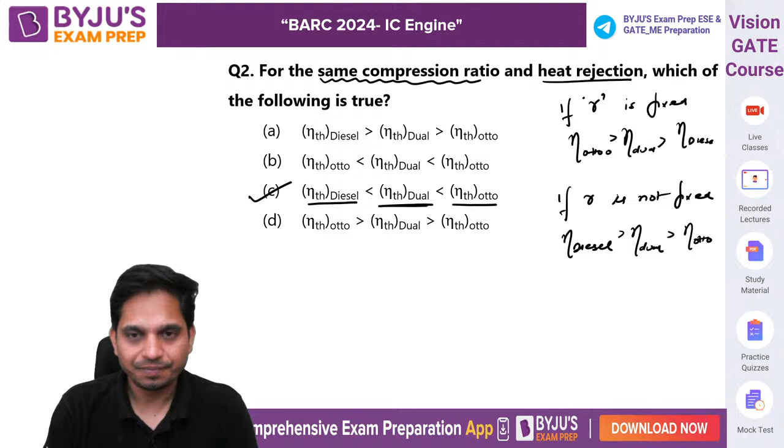So what is the right answer? A, B, C, D. Option C. Diesel is the lowest one, Otto is the highest one, in between you have dual cycle. Yes? Correct? Chalo, question number 3.

Supercharging in diesel engine is done primarily to... So what is supercharging basically? Supercharging is increasing the pressure and temperature of the intake air, मतलब intake charge, not just air, whatever charge is coming. So why do you do supercharging in diesel engine?

Supercharging is not done for thermal efficiency. It is done for mechanical efficiency. We are not doing anything with the heat transfer. Thermal efficiency is the work output that you are getting out of the heat supply. So we are not improving anything here.

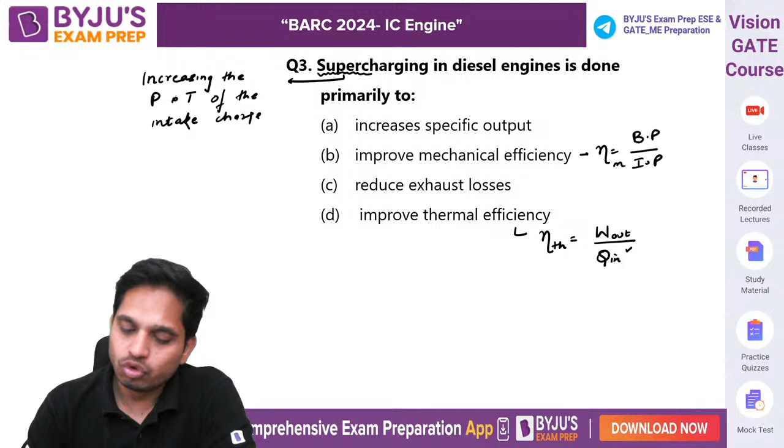What we do is we deal with indicated power and brake power. Brake power by indicated power. So it is done to improve the mechanical efficiency, not the thermal efficiency. Okay, chalo. Very simple question.

A diesel engine has a cut-off ratio of 2 and compression ratio of 20. Gamma is 1.4. Calculate air standard efficiency. Now this formula you need to remember: 1 minus 1 upon R to the power gamma minus 1. This is the efficiency of Otto cycle. You can multiply by RC minus 1, divide by RC minus 1. In the numerator, put a gamma here. In the denominator, put a gamma here. That's all. This is the efficiency.

1 minus 1 upon 20 to the power 1.4 minus 1, and this is 2 to the power 1.4 minus 1 upon 1.4 into 2 minus 1. So you can solve it. This is 2, so it is 1.639 upon 1.4. How much do you get? कितना आ रहा है ये?

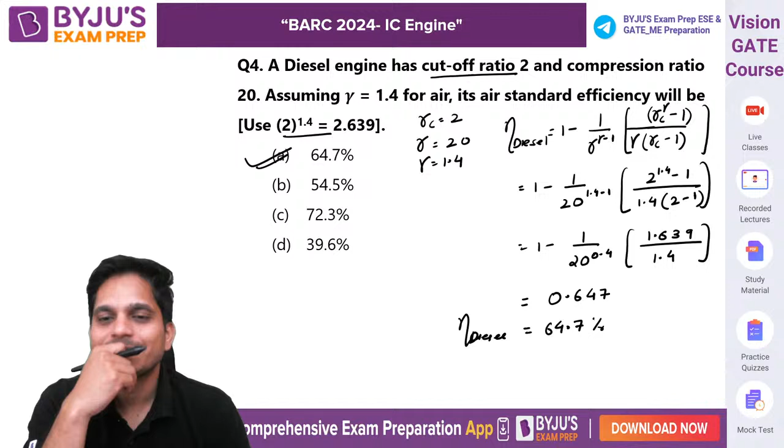I think you are going to get 0.647, something like this. And the answer is 64.7%. Are you getting the same? I hope that you are getting same. Yes? चलें आगे. Question number 5.

A car has a 4-stroke inline diesel engine whose compression ratio is this, expansion ratio is this. Find out cutoff ratio. You have to always remember the relationship, otherwise it will take some time, and you do not have that time. Compression ratio is equals to expansion ratio into cutoff ratio. With this expression, you can find out anything that you want.

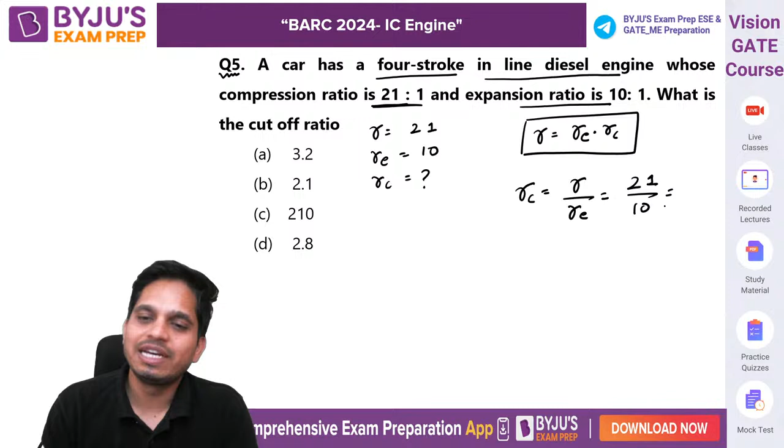In this question, you want to find out cutoff ratio. That means compression by expansion ratio. This is 21. This is 10. What is the answer? 2.1. You need to remember these equations, okay? Otherwise, if you start solving it, it will be an issue. Correct? ठीक है.

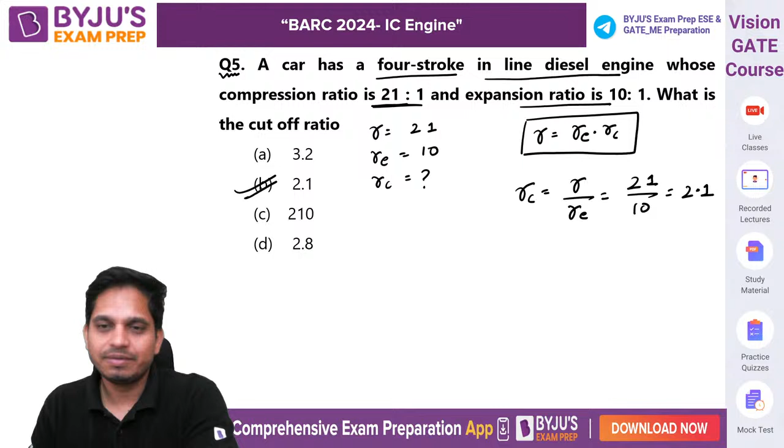At what cut-off does the efficiency of the diesel cycle approach that of the Otto cycle? So we all know Otto cycle efficiency is 1 minus 1 upon R^(gamma minus 1). Diesel cycle is 1 minus 1 upon R^(gamma minus 1), into, as I just now told you, (RC^gamma minus 1) upon gamma (RC minus 1). In the numerator put a gamma here, denominator put a gamma here, and this is your diesel.

Now you see, the best option here is not given, because the best option is when the cutoff ratio is equal to 1. So you will get diesel cycle efficiency as 1 minus 0 by 0. So you will apply L'Hospital's rule here, and you will get 1 minus 1 upon R^(gamma minus 1), which is the efficiency of the Otto cycle. But this is not given. This is not given because RC cannot be 1, okay?

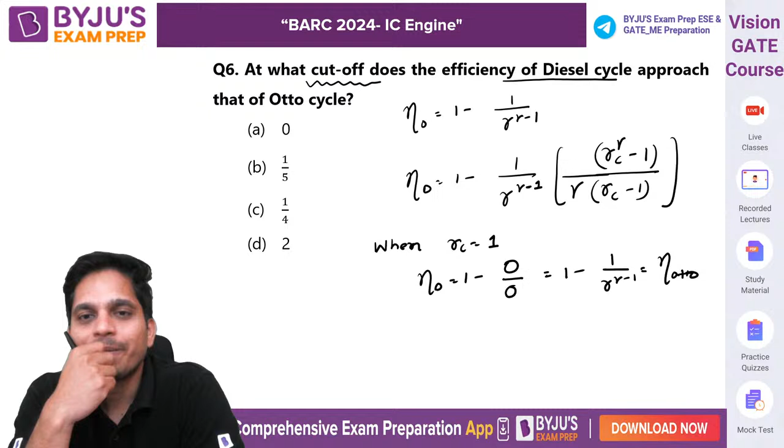So now the best option, we have to choose out of what is given to me. The best option here is when you put RC equal to 0. When you put RC equal to 0, you are going to get 1 upon gamma R^(gamma minus 1). So it is basically gamma times more, simply. It is almost the same as the Otto cycle. The only difference is gamma between them.

Okay, here we have a gamma factor. So this will be less and this efficiency will be more. It is gamma times more, but gamma is about 1.4, so almost 50% more basically. So it is slowly approaching the Otto cycle. If 1 is not given, then 0 is the best answer for you. If 1 is given, then you have to mark 1, because basically they are going to expect that from you. Okay. I hope it is clear.

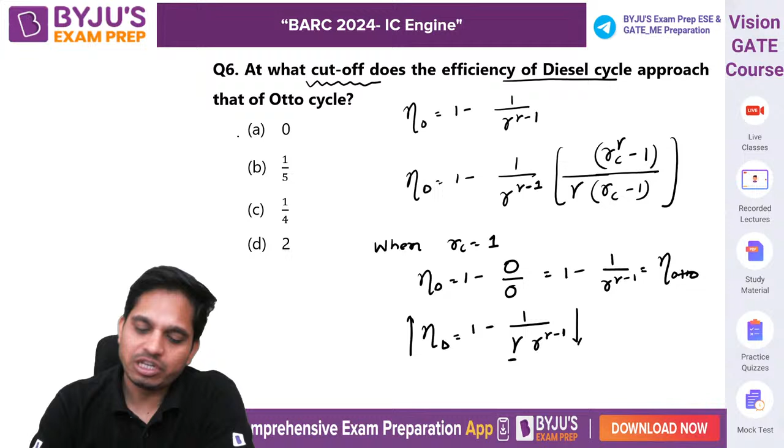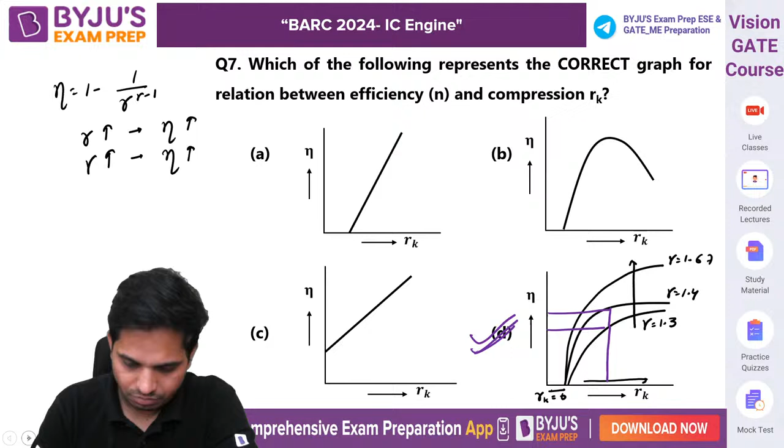Guys, I hope that you are doing it with me. Yes? Can you give me a yes if you are doing it?

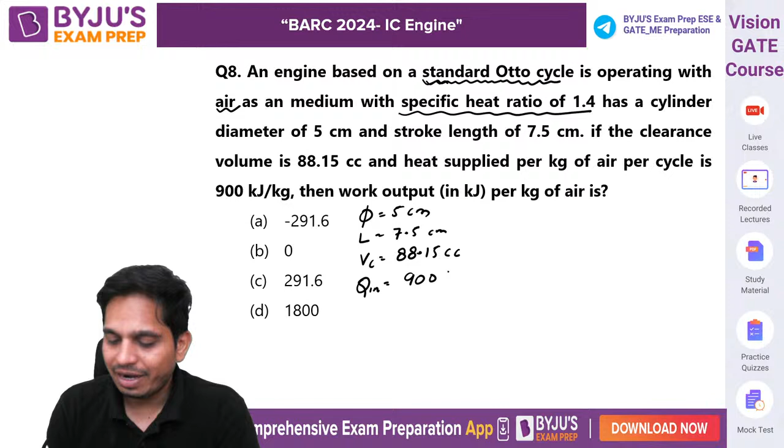An engine based on a standard Otto cycle is operating with air as a medium, with specific heat ratio 1.4, has a cylinder diameter of 5 centimeter, stroke length of 7.5 centimeter. Clearance volume is given as 88.15 centimeter cube, and heat supplied is 900 kilojoule per kg. Calculate net work output. What do you think we should do here?

So it's very simple. We have the efficiency formula for Otto: 1 minus 1 upon R^(gamma minus 1) is equal to net work by Q in. If somehow I am able to find R, I can find net work, because net work will be Q in times (1 minus 1 upon R^(gamma minus 1)). Gamma I know. Only R is required. How do we find R? We know R is equal to 1 plus swept volume by clearance volume. Clearance is already given to me. I need to find out swept volume.

So 1 plus pi by 4 D square into L upon clearance volume. So 1 plus pi by 4 into 5 square. Sir, why are you not changing centimeters into meters? Because in the numerator also you will get cubic centimeter, and this is already given in cubic centimeter, so it does not matter. How much R are you getting? So this is 0.785 into 25 into 7.5 upon 88.15, plus 1. You will get R. Whatever R you are getting, you can put it here, with Q in as 900.

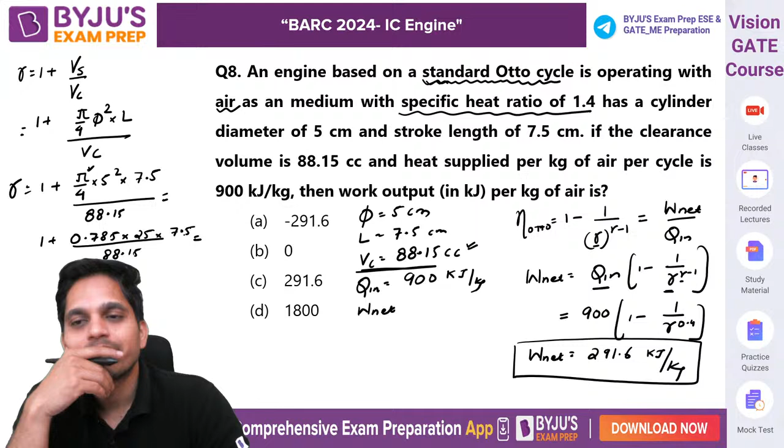2.66. Very good. 2.67. Okay. That you can put here. And I think you will get the same efficiency, if I remember correctly.

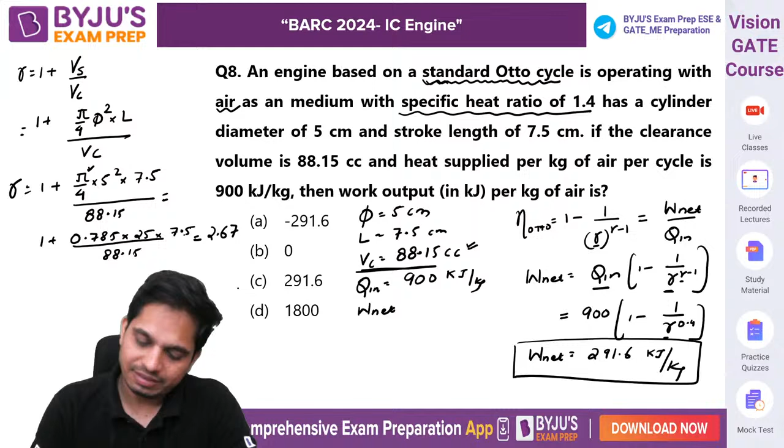Question number 9. In an Otto cycle, air is compressed from this volume to this volume. Okay, from the starting pressure of this, net output per cycle is given.

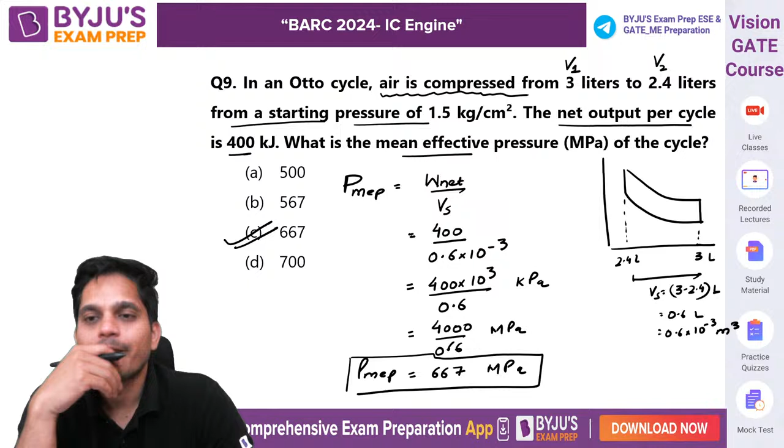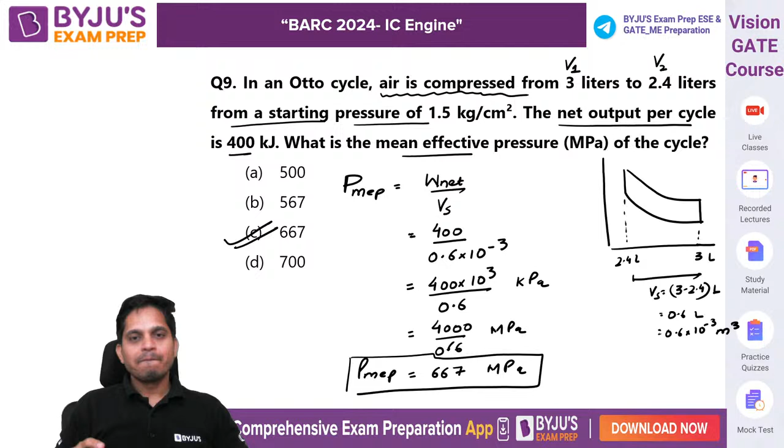Question number 10. Number of working strokes per minute for a 2-stroke engine cycle as compared to speed of the engine in RPM. So it's very simple. The language looks very tricky, but the question is very simple.

Look, whenever there is one revolution of your crankshaft, then it is one working stroke. One working stroke. Right? In one revolution, we have total 2 strokes, but only one working stroke. Yes or no? One revolution of the crank is equal to, whenever we have one revolution here,

so from here to here, 2 processes, then from here to here, 2 processes. So in the entire revolution, we have total 4 processes, but 1 working stroke. So in total 1 revolution, we have 1 working stroke.

Now it is asking how many working strokes in 1 minute. So working strokes per minute you need to find out in 1 revolution, in 1 RPM, 1 revolution per minute. So basically we have divided both. If 1 revolution has 1 working stroke, then 1 RPM, 1 revolution per minute, is equal to 1 working stroke per minute.

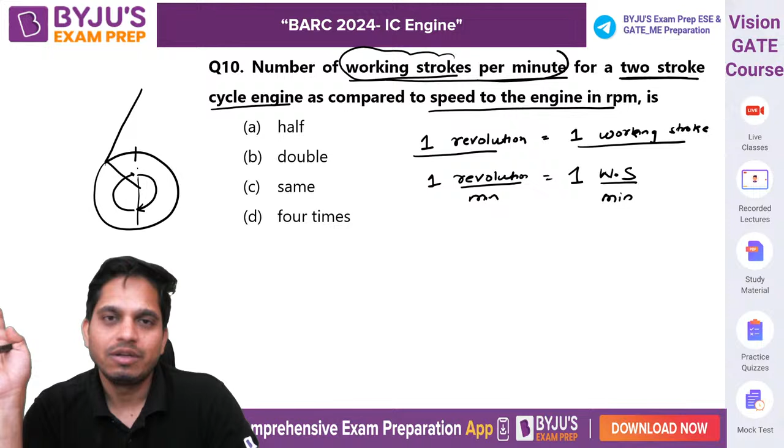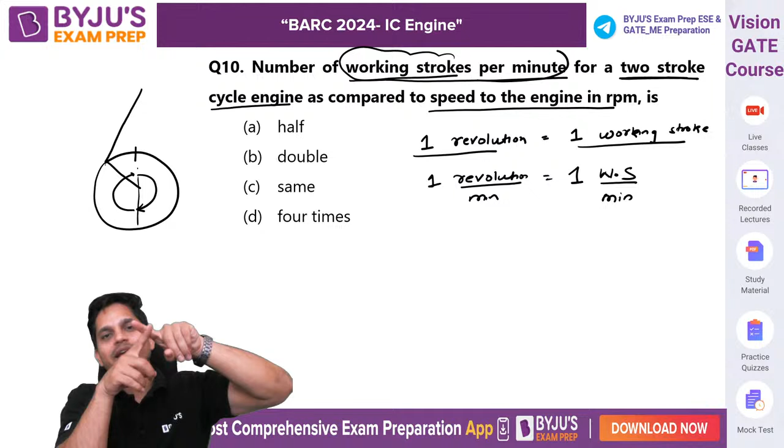Okay. So basically it is trying to say, if you are making 1 revolution in 1 minute, then you have 1 working stroke in 1 minute. If you are making 10 revolutions in 1 minute, then you have 10 working strokes in 1 minute. Simply. Okay, got it? So it is basically the same for 2 stroke. For 4 stroke it is half.

Right? Because for 4 stroke, in 2 revolutions you have 1 working stroke. So 2 revolutions per minute is equal to 1 working stroke per minute. So 1 RPM is equal to 0.5 working stroke per minute. I hope you get this, okay? It is very important. A lot of students remain confused with this for 2 stroke. Got it?

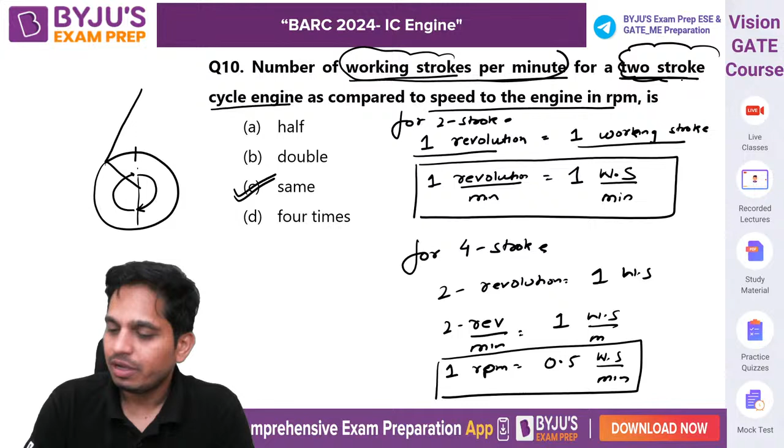Yes. Chalo, same. Because it is asking for 2 stroke, so it is same. If it is 4 stroke, it is half.

Which of the following statement is more relevant in the context of IC engine? Basically, it is asking which one is correct. Compression ratio of the fuel air mixture is in the range of 6 to 10 in spark ignition engine. Is it correct? Let's read other statements as well. Compression ratio for air is in the range of 16 to 20 for SI engine. No, 16 to 20 is for CI engine.

Walls of the engine cylinder of SI engine need to be thinner because the operating pressure or mean effective pressure is lower in SI engine compared to CI engine. Diesel engines, when we use them in cars or whatever, are much bigger, much thicker, much bulkier, much heavier. Compression ignition engines have less weight? No, CI engines have higher weight. So the only option that is correct is A. Yes.

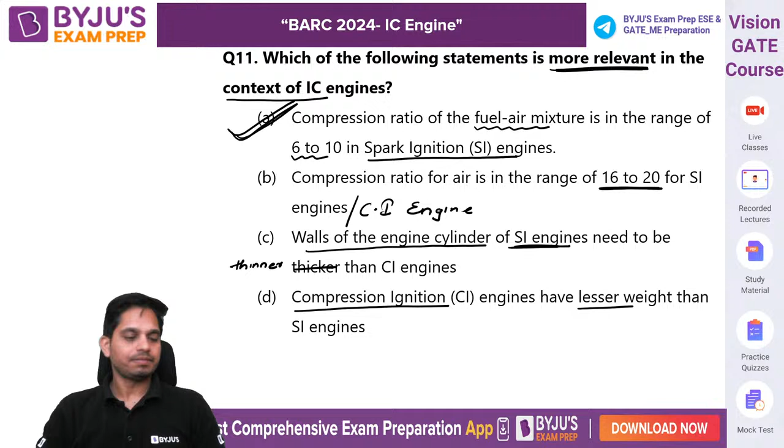Chalo, next dekhte hain. The function of piston rings in internal combustion engine is also to. Also means what is the other function? But what is the first function? First function is to provide sealing action so that the lubricating oil or your fuel air mixture will not be able to go down the crankcase. That is the first main function of piston rings, to provide a sealing effect.

Then what else? Increase the speed? No. Actually, it will have more friction because the piston ring is in contact with the cylinder. Prevent piston from corrosion? No, it is not. Cool the cylinder? For cooling the cylinder, we use lubricating oil. Dissipate heat to cylinder walls. This is what they do. Why? Because they are in contact with the cylinder walls.

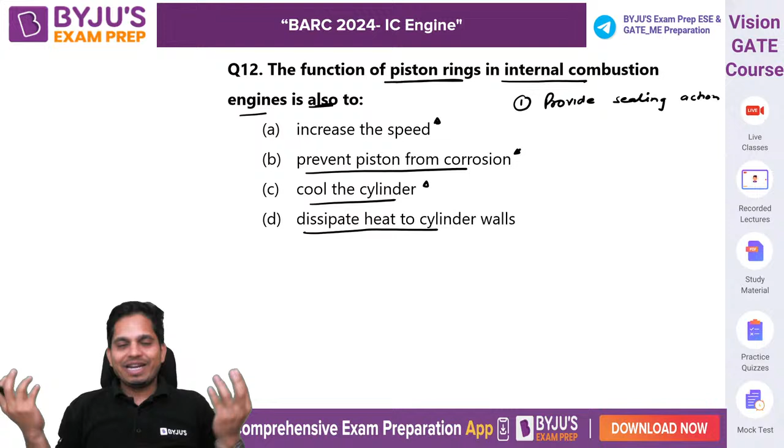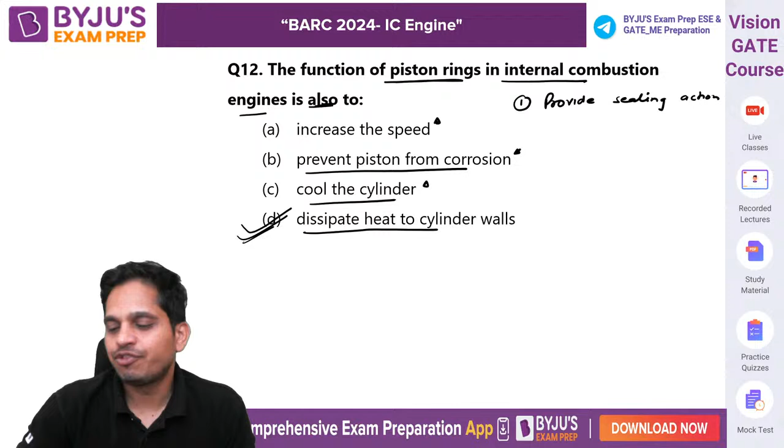So whenever combustion happens, a high pressure wave is formed and pushes the piston, so the piston gets heated up. Now the piston is attached with piston rings, so the piston rings take that heat and transmit it out through the cylinder walls. Okay? This is the secondary function. The first function is to provide sealing action. Okay, chalo.

What will be the effect? Now this question is asked by many students. What will happen if you mix diesel in a petrol engine, and vice versa? If you have a petrol engine and let us say you work with diesel, then what will happen? Simple answer is it will not work. Why? Because the flash point of diesel is much more than petrol.

Basically, if I have petrol in my hand, or if I spill petrol here on the ground, it will vaporize. It easily vaporizes. But diesel, if I spill it here, it will not vaporize. That means the flash point for diesel is higher. So whenever diesel and air go into the carburetor, what happens there? Atomization, vaporization, mixing. But neither atomization nor vaporization will happen, so mixing will not happen.

In the carburetor, we want to atomize, vaporize and mix the fuel with air. But because the flash point is higher, it will not vaporize, so mixing will not happen. For a petrol engine to work, you need a homogeneous mixture of air and fuel. But because mixing will not happen, it will not be a homogeneous mixture. So when it goes into the cylinder, the fuel will not burn.

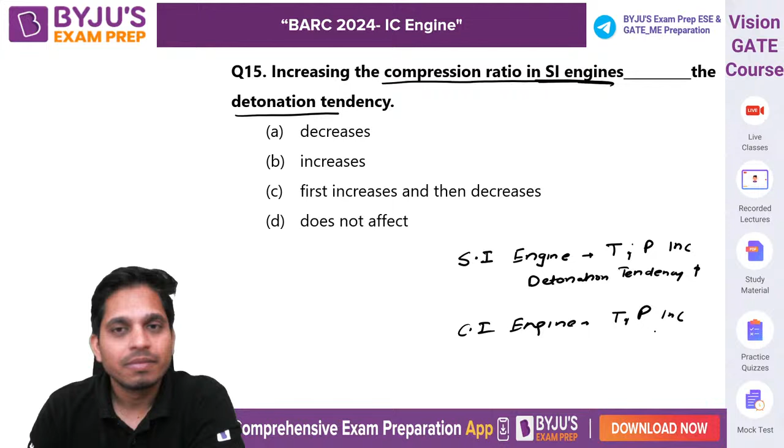But in CI engine, any reason that increases temperature and pressure will reduce the ignition delay period, and detonation tendency will decrease. And it is saying if in SI engine you are increasing compression ratio, that means temperature and pressure will increase, and that will increase the detonation tendency. Okay?

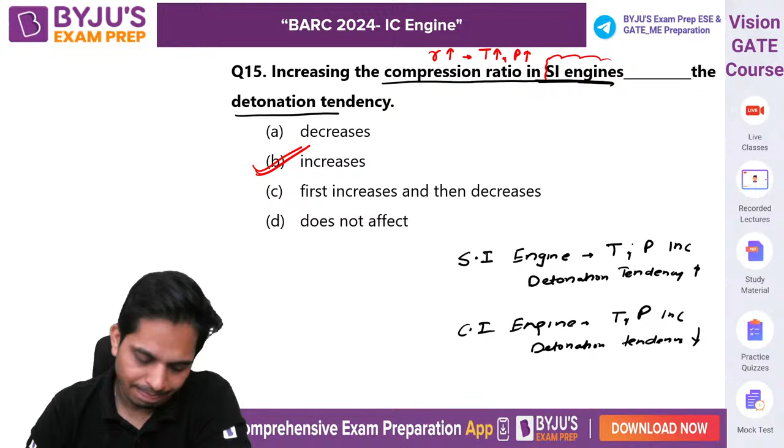The knock rating of a SI engine, petrol engine, is determined by matching the performance of engine with which reference fuels? Cetane benzene, isooctane normal heptane, cetane and alpha methyl naphthalene, isooctane and alpha methyl naphthalene. What is the answer? Isooctane and normal heptane. These are the reference fuels for SI engine, and cetane and alpha methyl naphthalene are the reference fuels for CI engine.

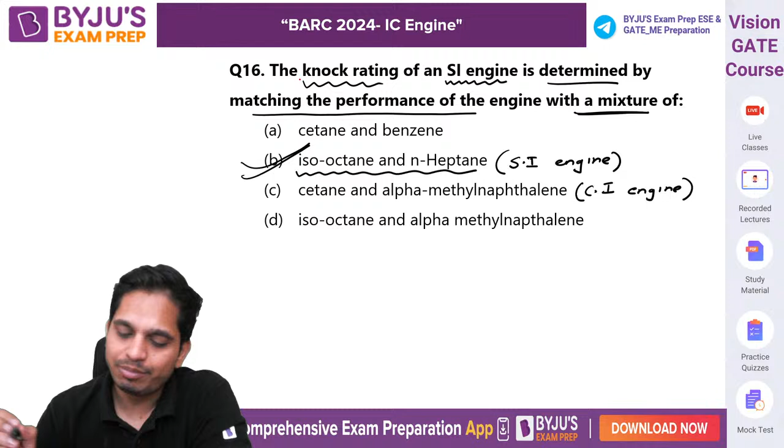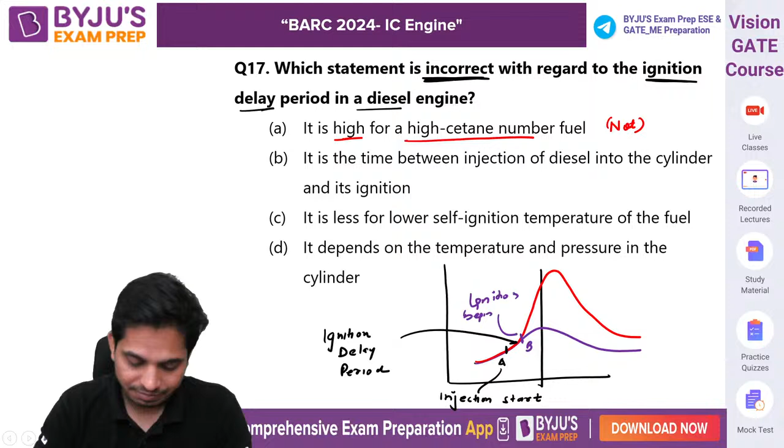Now let's read the option. It is saying ignition delay is high for high cetane number of fuel. Is it correct? It is not correct. Why? Cetane number tells you the ignition quality, so high cetane number means better ignition quality, means low ignition delay. Fuel will burn quickly. It is the time between injection of diesel into the cylinder and its ignition.

This is correct: ignition delay is less for low self-ignition temperature. Of course, if a fuel has low self-ignition temperature, its ignition delay period will be small, it will start igniting sooner. So this is also correct. It depends on the temperature and pressure too - if temperature and pressure is high, ignition delay period will be low. So this is also correct. They are asking for incorrect, so the incorrect option is A.

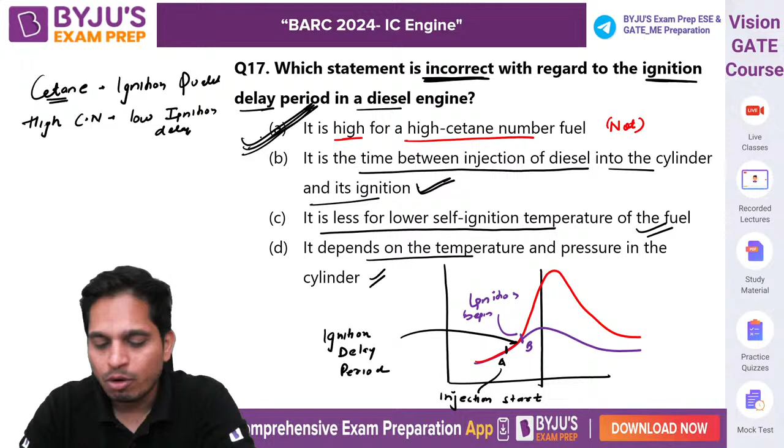Now, the self-ignition temperature of diesel compared to petrol - how much is it for diesel? Diesel has around 210 degree Celsius. How much is it for petrol? What is the range?

Is it higher? Are you saying A? Petrol is around 250 degrees Celsius. So which one is higher, which one is lower? Diesel has a lower self-ignition temperature.

And that's why we increase the pressure. Because if we use petrol, and you want to increase its pressure to reach self-ignition temperature - when you compress it, you want the temperature to reach its self-ignition temperature, so you have to compress much higher than a diesel engine. Why do we have to compress much higher? Because its self-ignition temperature is higher - it actually goes to around 280, 300 degrees Celsius as well. I'm giving you an approximate figure of 250, but it can go up to 280, 300 also.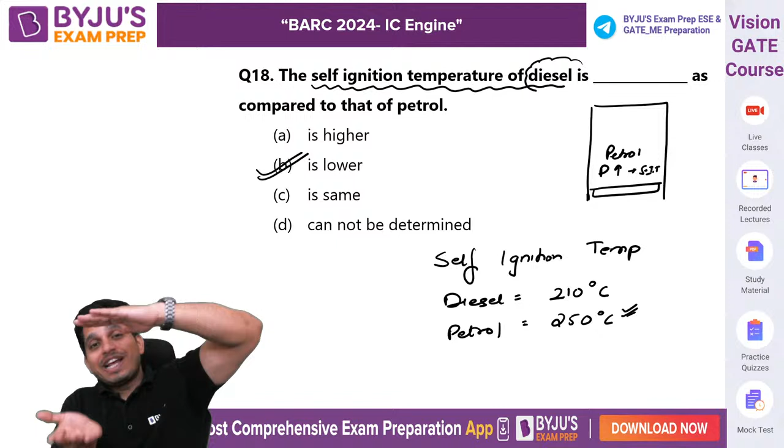So you have to keep diesel - for example, you are compressing, and diesel has already reached whatever temperature needed. If you are using diesel as fuel, it has already reached the self-ignition temperature, so ignition can start. But if you are using petrol, you have to compress more, then it will reach its self-ignition temperature. So you have to compress more with petrol, meaning pressure is high, meaning you need thicker walls. So if you use petrol with self-ignition technology, you need thicker, heavier engines - much heavier than a diesel engine. So the answer is lower.

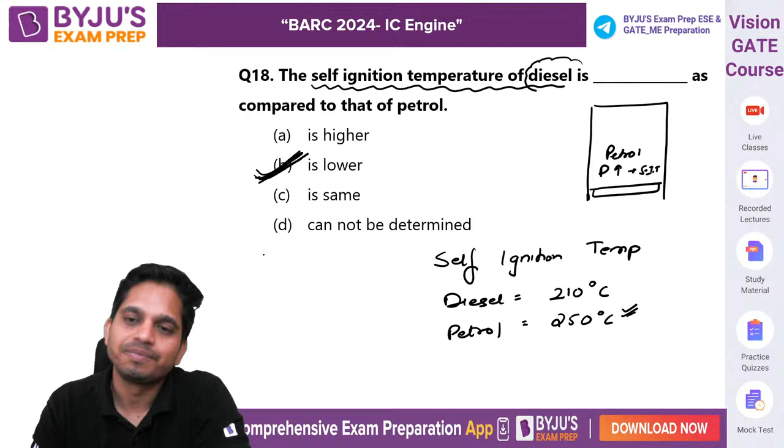Okay, for a single cylinder 4-stroke oil engine, indicated power is given, calorific value of fuel is given, and fuel consumption is given. Calculate indicated thermal efficiency.

Sir, what is indicated thermal efficiency? Basically, thermal efficiency is calculated by the heat added. If it is indicated thermal efficiency, then it will be indicated power upon heat input. Indicated power is given as 15 kilowatt. How much heat are you adding? Mass flow rate of fuel into calorific value of fuel. So 15 divided by 0.001 into 40,000, so it is 15 by 40.

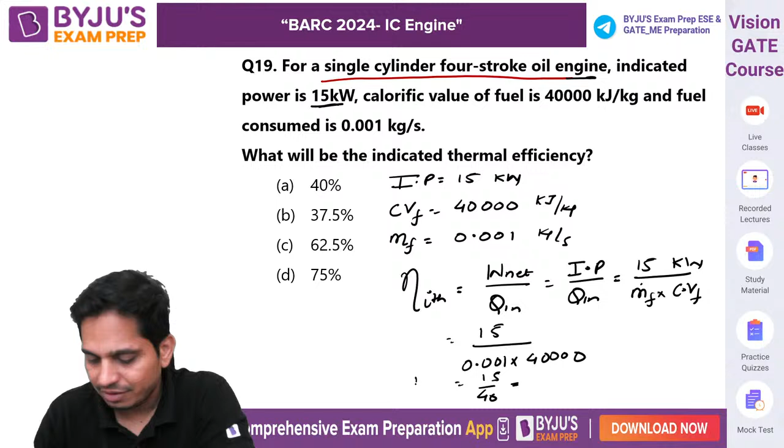So you can calculate how much you are getting - 15 by 40. How much will it come to? B, 37.5. Yes, 37.5.

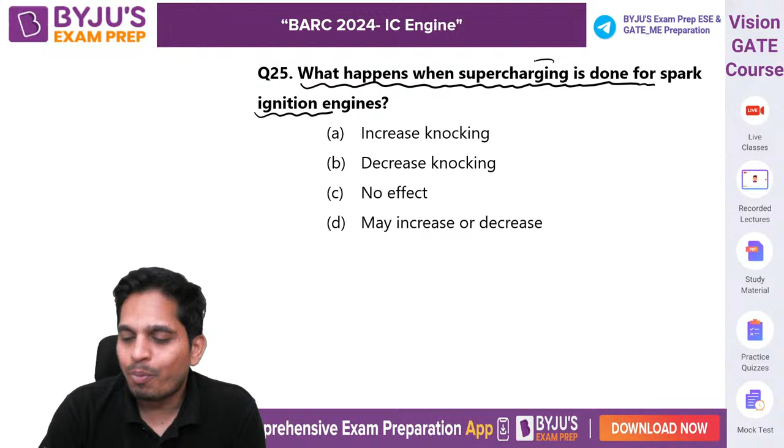I think I already answered this during the class, if you were attentive. So if you do supercharging, what is supercharging? In the beginning I told you, it increases the pressure and temperature of the intake charge. Now, yes, very good, it increases knocking. I already told you, any process that increases the pressure and temperature in an SI engine will increase the knocking tendency.

So supercharging is not preferred in SI engine, but in CI engine it is very well preferred because it reduces knocking. So in CI engine, in diesel engine, supercharging is very well preferred. In SI engine it is not very well preferred. Okay, chalo, very well, so it increases knock.

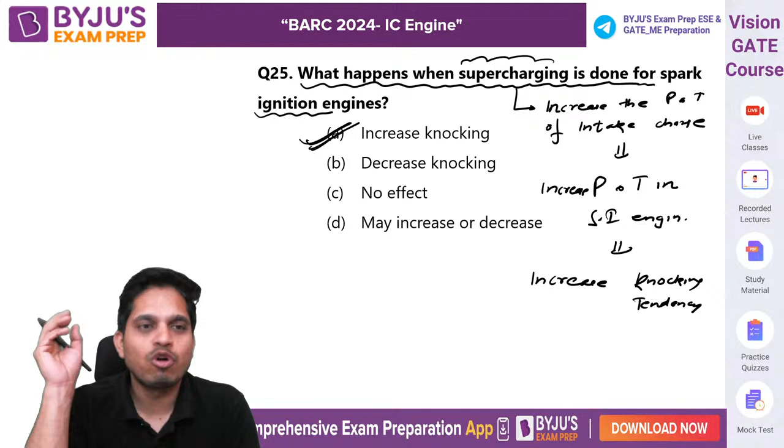Very good. So this ends, we have done 25 questions from IC engine. This ends today's discussion on IC engine.